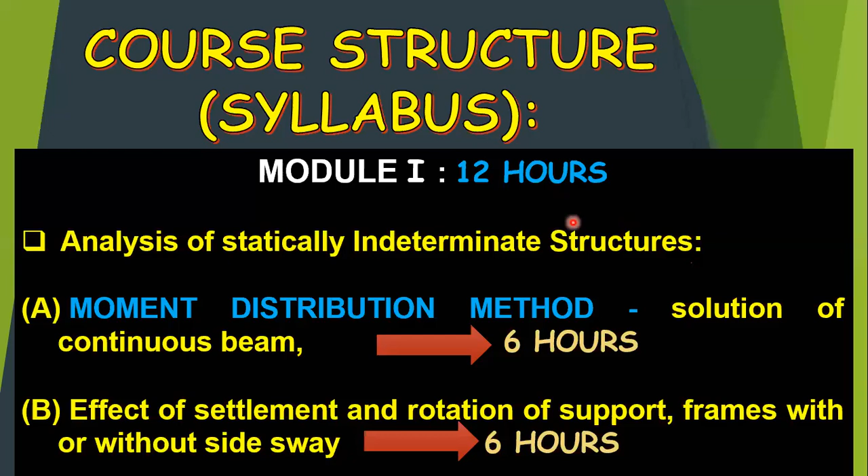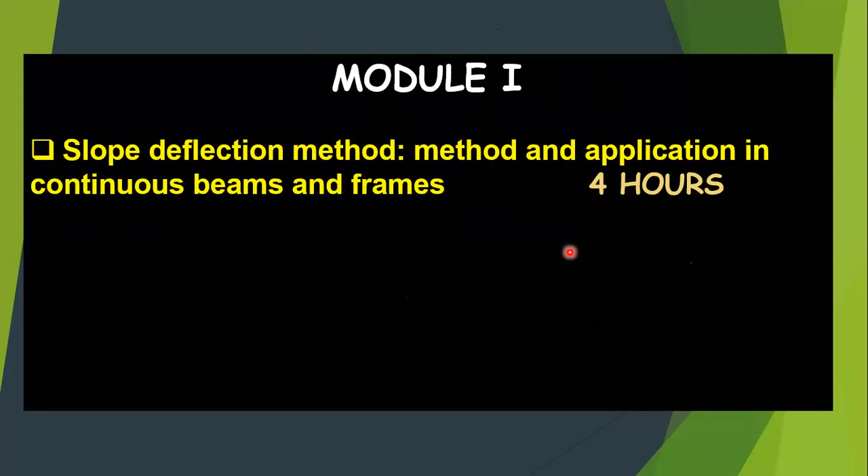Now coming to module 1 - it's a big module - we will learn the slope deflection method, its application in continuous beams and frames. We will be analyzing frames, 2D simple portal frames, two-dimensional simple portal frames, using the moment distribution method and also the slope deflection method, which will take about 4 hours. Then we will learn the analysis or behavior of suspension bridges.

My dear students, it's very important, it's very nice. We will be learning how the forces are acting on suspension bridges and stiffening girders. I will show you how suspension bridges and stiffening girders actually play an important role in connecting areas, connecting countries, and even helping in transportation facilities.

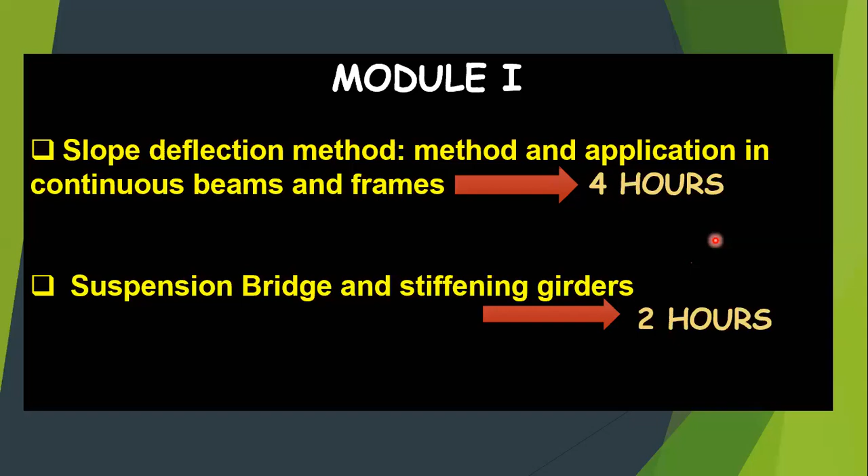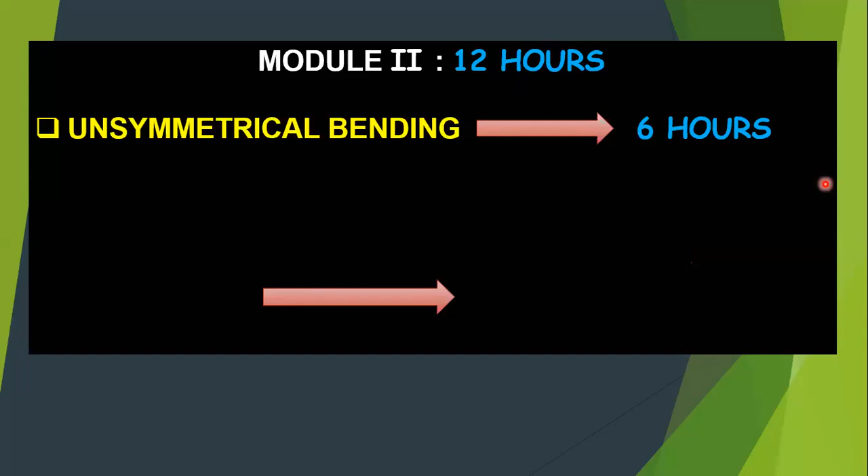Secondly, in module 2, which I will take, it is about 12 hours. In module 2, we will be learning unsymmetrical bending. Whatever loads come on a beam - it may be a beam, slab, column, or any structural member - we will learn how unsymmetrical bending occurs, what is the behavior, and how to find out the bending moment and stresses. We will learn everything about unsymmetrical bending, which will be the first chapter starting from the next class. This will take about 6 hours.

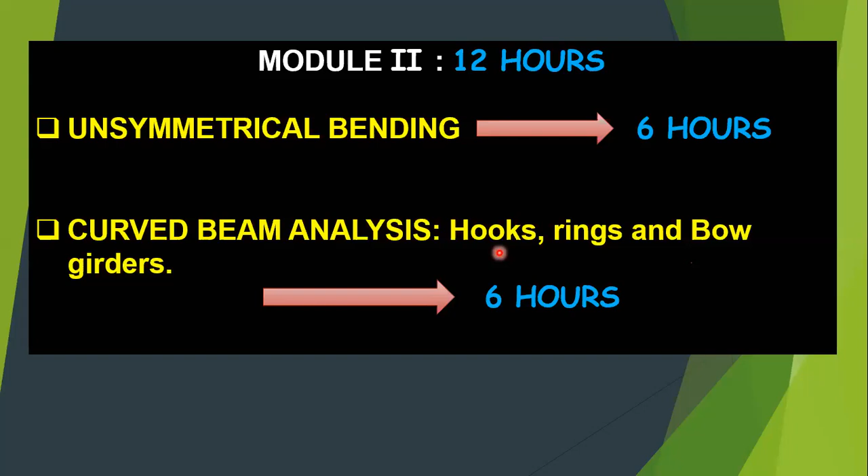Second, we will have curved beam analysis - that means beams which are curved, not vertically, but in plan. We have seen curved balconies, curved auditoriums, curved surfaces. So we will learn the analysis of curved beams, along with hooks, rings, and bow girders. Again, it will take 6 hours.

In module 3, again it is being taught by Professor Pooja Basu Choudhury. In module 3, we'll learn about the plastic analysis of structures. That means till date, we have learned about all the members, all the behavior of structures considered when the behavior is elastic.

Elastic meaning the stress-strain relationship is linear. Stress is directly proportional to strain, as far as we have Young's modulus of elasticity also. But in this chapter, we will learn about inelastic behavior of frames as well as beams.

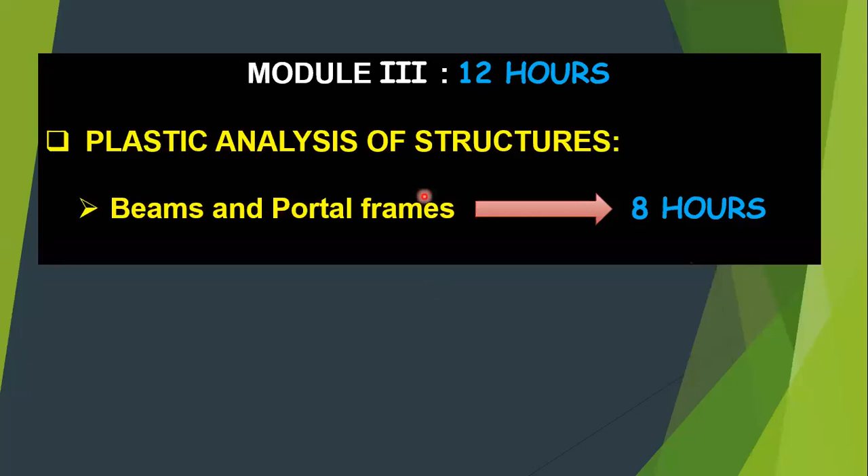It will take about 8 hours. It's a very easy part. In module 4, again it will be taken by me, which will take 10 hours. The first portion, we will have approximate method of analysis of structures subjected to lateral and horizontal loading. Very important, we will study the behavior of all the frames, the various frames.

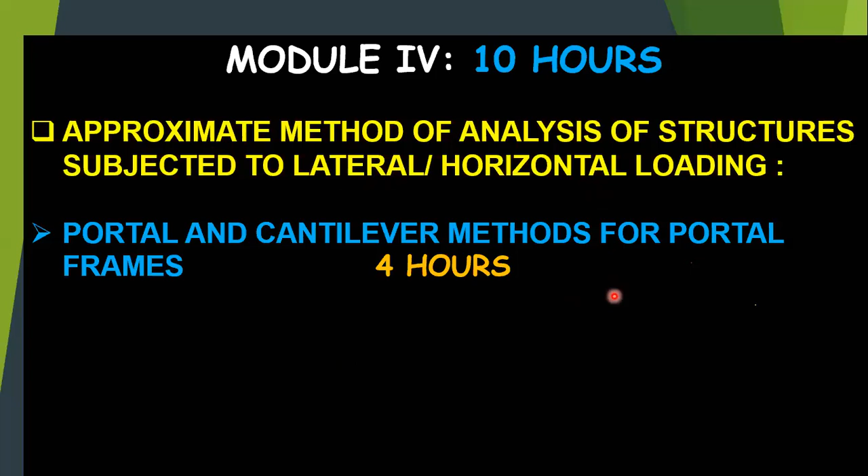That is two-dimensional frame, I will show you how it looks. Two-dimensional frame subjected to wind load or earthquake load, like that, subject to lateral loading. We will learn the approximate method, not the accurate method. In that we have portal and cantilever methods for portal frames, which will take 4 hours.

And the last portion of our chapter will be analysis of indeterminate structures using matrix method. Using the operations of matrix analysis, which you have learned in engineering mathematics, we will learn how to find or determine the shear force and bending moment, the slope and deflection also, using the matrix operation, primarily using two different methods, stiffness and flexibility method, which will take about 6 hours.

So overall, if you add all the hours, we are taking more or less 42 to 44 hours. So this is the schedule, or this is the scheme of the syllabus in analysis of structures 2. This is everything, my dear students. If you are able to, please write down or keep some note.

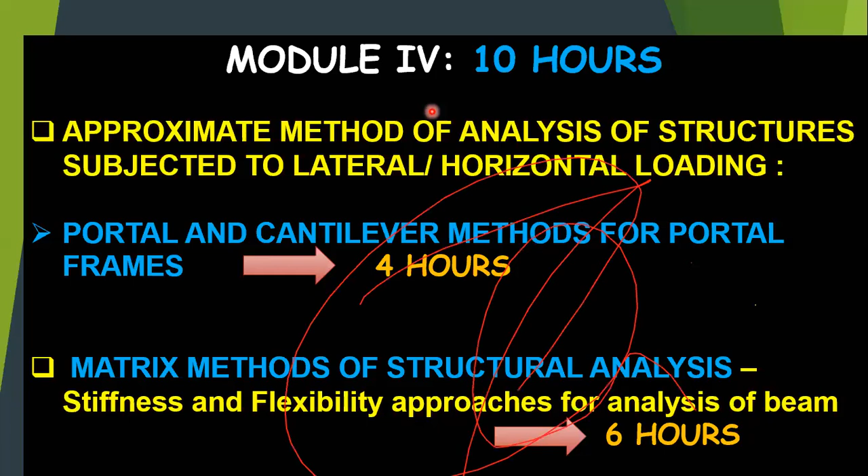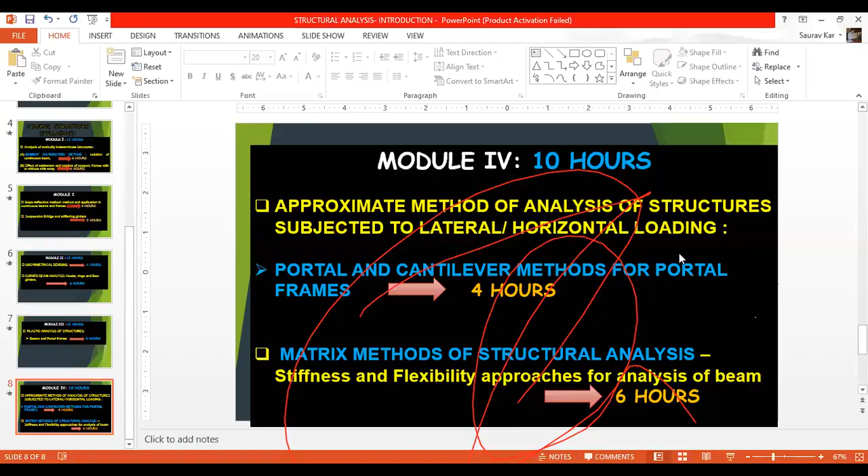Okay, so coming to, this is the scheme, or this is the schedule of the syllabus which we are going to learn in this chapter. Now coming to, if you talk about structures.

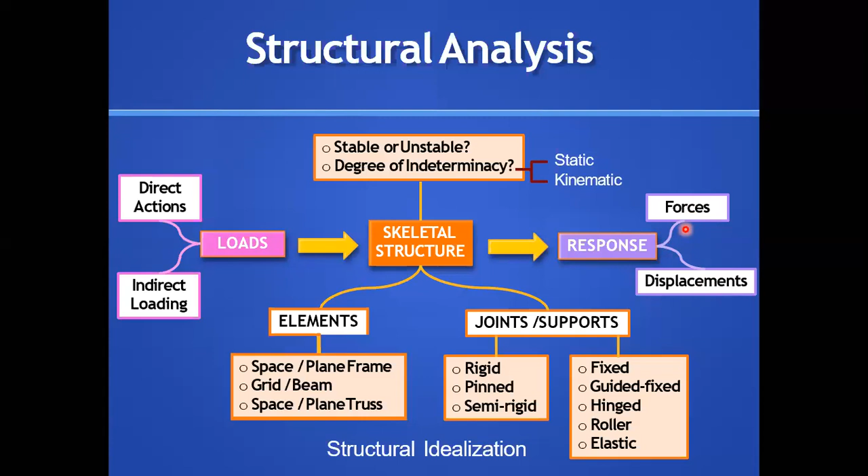Secondly, as I told you, we have load, we have structure, we have response. On the direct action, the direct loading action can be segregated into force field. Primarily for structures, whatever response we get - load is basically the input, response is basically the output. So the input, the direct loading, can be considered under force field.

Indirect loading can be under displacement. Why do I say direct loading? Because direct loading, as I told you, can be dead load - that is self weight of the structure - live load, the load of your accessories like table, chair, almirah, then human beings, live load. We can have wind load due to wind, tornadoes. We can have earthquake loads, seismic tremors. So direct loading will directly come to the forces as forces, and indirect loading, as I told you, support settlement, deflection, all these under displacement field.

And when talking about response or behavior, support reaction - as I told you, in response what we're learning - we will learn the support reactions, that is the reaction due to supports, and internal force resultants, the forces generated internally, that is axial forces.

We have learned that when we are cutting a two-dimensional member, we get three different forces: a shear force, a moment, and an axial force. So we have support reactions, internal force reactions, and displacements.

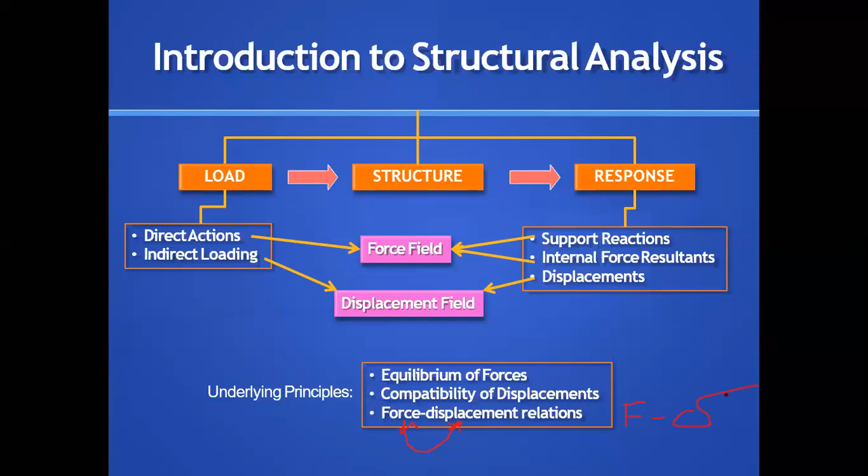So regarding loads, we can have dead loads, live loads, wind loads, snow loads, earthquake, soil and water pressure, which we learned in soil mechanics. We have wave loads whenever the structure is in a marine or seashore environment, and blast loads due to explosion. Nowadays the concept of blast-resistant structures is coming into the picture. So primarily dead, live, wind, snow, earthquake.

These five are primarily the loads as given in our Indian Standard Code IS 875, Part 1 to Part 5. You'll be learning in RCC, reinforced cement concrete, that we have various different codes.

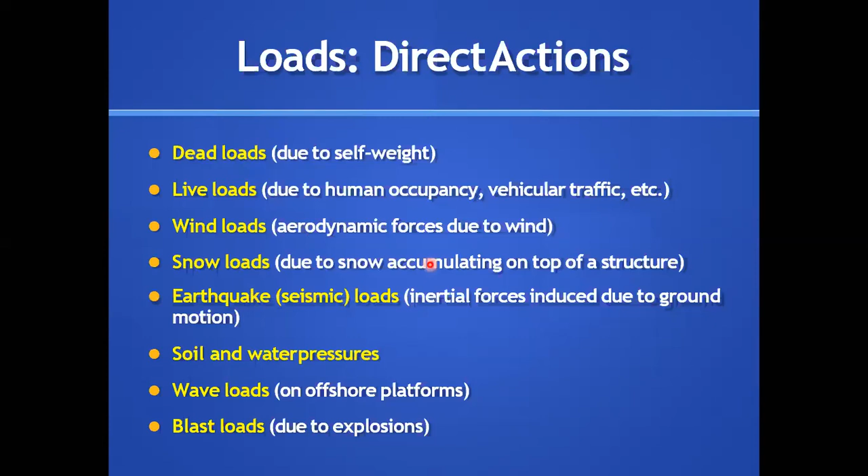Talking about direct loading, we have concentrated loads as we've learned, and distributed loads in kilonewton per meter, which is the intensity of load per meter. Sometimes we have kilonewton per meter square, the intensity of load per meter square in case of slabs. In slabs, as we'll learn in design of reinforced concrete structures, the intensity of loading is per meter square, but for beams it will be kilonewton per meter.

Please keep in mind, I'm talking about a very fundamental part here, from now on you should retain these things. Along with concentrated loads and distributed loads, we can have concentrated moments and distributed moments.

Whenever we have a concentrated load not falling on the centroidal axis — if you see this picture, this dotted line is the centroidal axis, but I have a concentrated force acting at some distance, an eccentricity E — then at that eccentricity, if the load is acting, we get a moment equal to P multiplied by E, that is PE, which is a moment. This section is basically inside the screen; if this is the section along the ZX direction left to right, it's inside the screen, not to the right or left side. So if we have a loading like that, we can have a moment due to eccentricity.

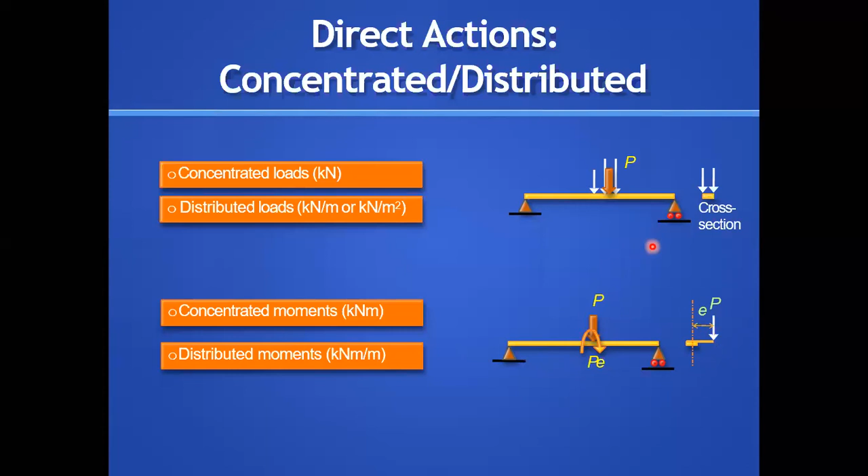Your teachers will be talking about eccentric loading in case of columns and beams in reinforced concrete design. For indirect loading, which I was mentioning, many students or many teachers don't discuss about that.

If you have unequal contraction or unequal expansion due to temperature differences, that is an effect coming on the structure, which is environmental stressing. So we can induce a force response if the structure is over rigid, otherwise only a displacement response. That means we can get force behavior as the output if the structure is over rigid, meaning I am additionally adding unnecessary members - that is over rigid. Otherwise, we will get only displacement response.

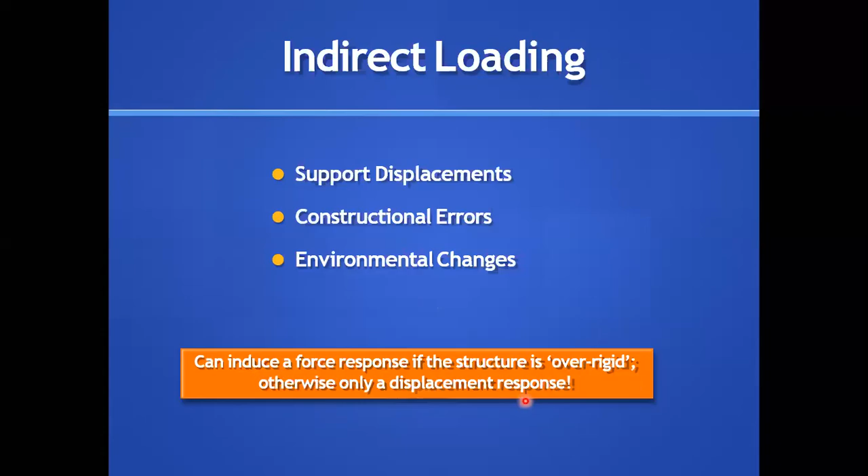Now, I already talked about how we have learned statically determinate structures with this part and work energy methods in structure analysis 1. Even the force method also. But primarily, we will learn the stiffness method, slope deflection method, moment distribution method - the displacement methods.

Basically, we have two types of methods, my students: force method and displacement method. In the displacement method, displacement is taken as the unknown. We have the slope deflection method and moment distribution method.

While in the force method, we have learned theorem of least work, virtual work in the last classes, method of consistent deformation - all these things. Also later, we will learn the flexibility and stiffness method. Flexibility method is considered as force method, while stiffness method is considered as displacement method.

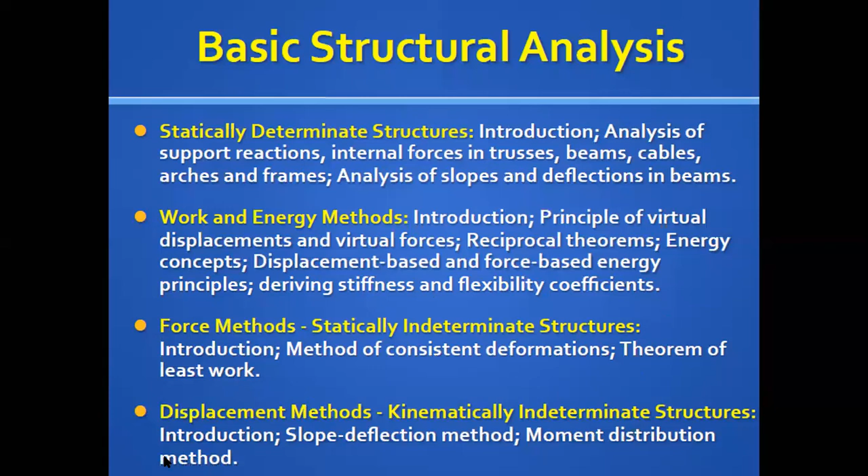Now, I was talking about the structure. We will have loads coming on the structure, we will have the response, and based on this response, we will do the structural design. We will check all these 5 parameters: stability, strength, economy, stiffness, and aesthetics.

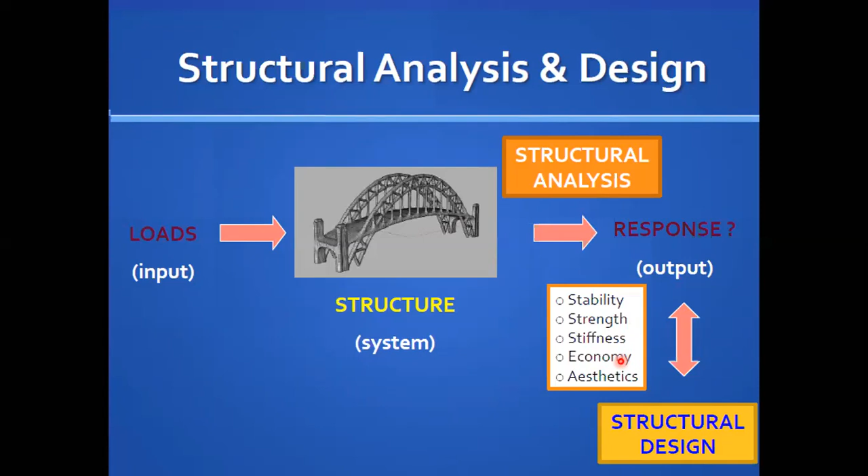Primarily for bachelor or master degree courses, we will be basically involved in stability, strength, and stiffness. These three are the primary considerations when we are designing or analyzing the structure as a structural engineer. When talking about realistic construction, we also consider economy - the structure should be cheap enough - and aesthetics, the looks. The structural analysis is the application of solid mechanics to predict the response of a given structure.

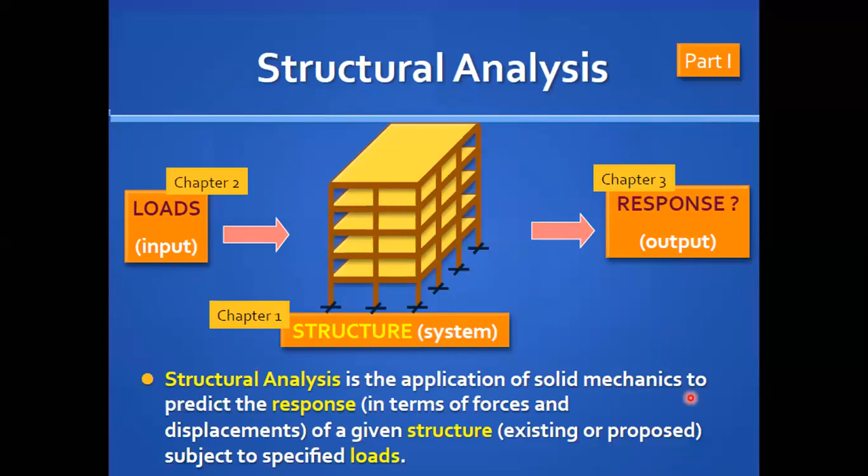I told you about idealization, which means conceptualizing or imagining. If you see the full structure, we have beams and columns - this is called the frame structure. We have beams, columns, and slabs. For the last 20, 30 years, this concept of frame structure has come into consideration because the majority of loads are taken by the beams and columns, even the slabs also.

Basically, it's a frame space structure, called frame structure. For the last 30 years, we have been getting into the concept of frame structures. Earlier, we had the concept of load-bearing walls, called the load-bearing structure, where the walls used to be much thicker, about 10 to 12 inches, but the maximum load was taken care of by the load-bearing walls. But for the last 30 years, because of advancement in RCC and steel, we have converted to frame structure. So this is the idealization or conceptualization.

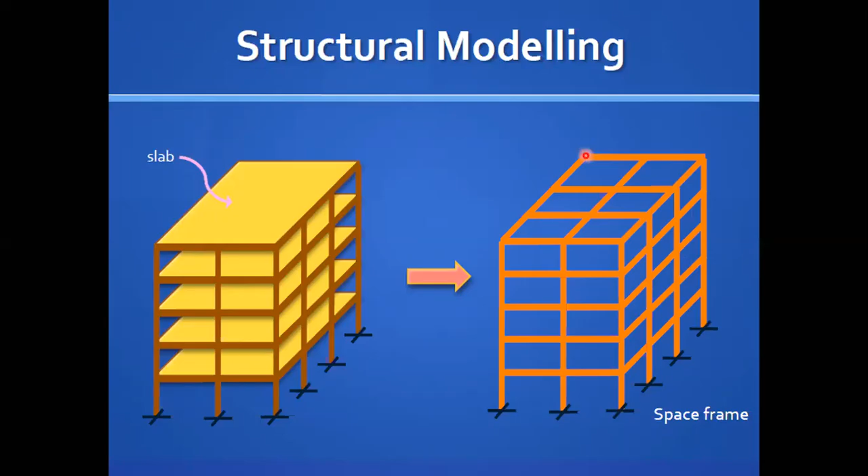We have already learned about simply supported beams, fixed beams. Primarily, you have learned simply supported beams, but in this chapter, analysis of structures 2, we will be delving into fixed beams and continuous beams. Primarily, we have talked about plane truss, how to find out the degree of static indeterminacy, DS and DK, plane truss, plane frame. Such plane frames you will observe or face subsequently.

Then we have funicular cables - we have cables, funicular cables. You will have these in the case of stiffening girders. Then we have arches. We have already learned 3-hinge arches. In this course, we will learn 2-hinge arches.

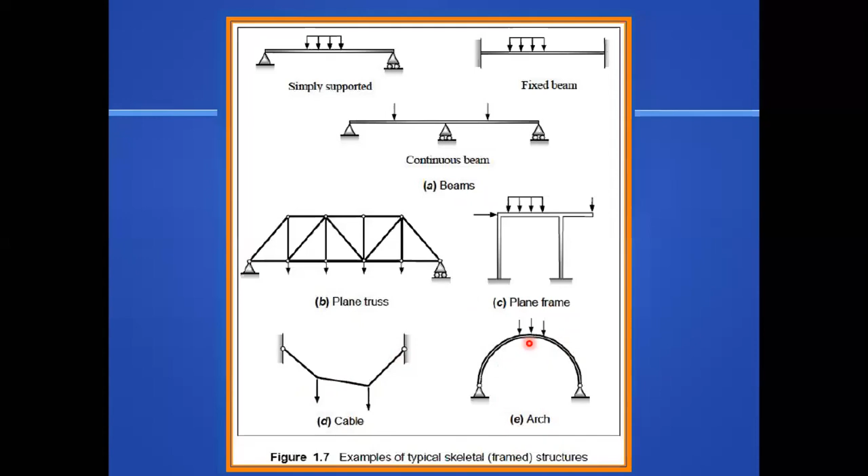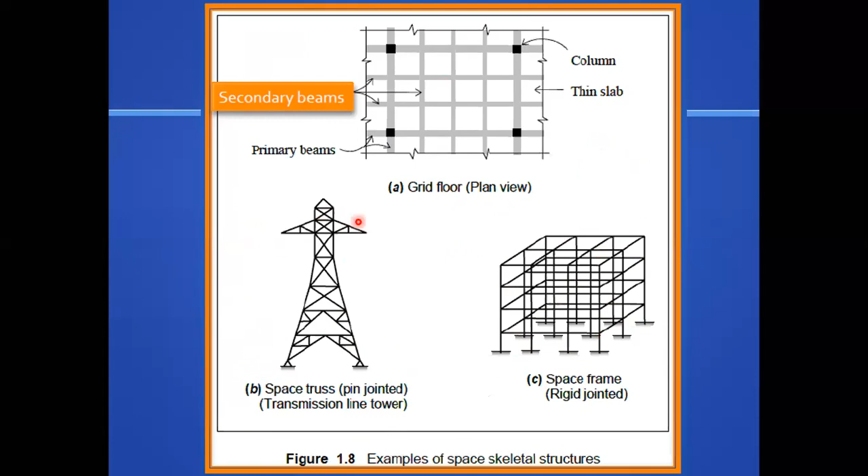So already I told about grid floor plan, grid floor concept. We have columns, we have slabs, and I told that we have rigid jointed frame structure. And here we have seen communication towers, transmission towers - all these are 3-dimensional.